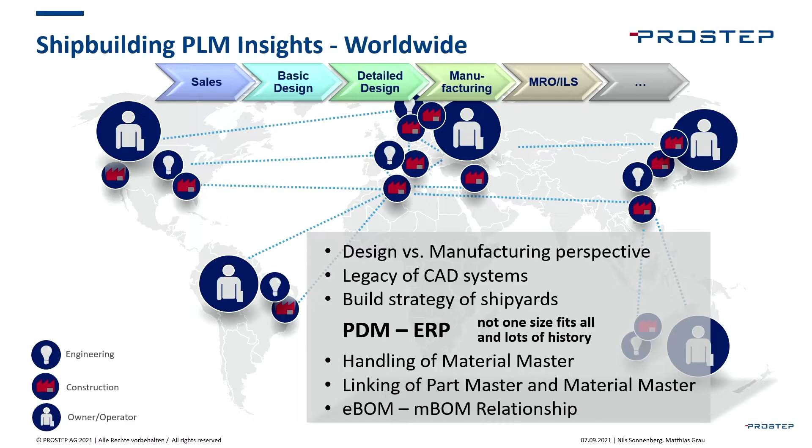Shipyards use different build strategies depending on their logistical capabilities and manufacturing approach, such as yard internal section pre-outfitting versus turnkey supplier for specific systems or spaces. This has an impact on the interaction of PDM and ERP and needs to be addressed by shipyards in order to be flexible and efficient at the same time.

Today we are going to discuss one of the most important topics related to PDM-ERP interaction. This is how material master data is best handled in a shipyard and how parts and materials are linked in both a make as well as a buy situation. This fundamental relationship of product design and realization is one of the longest experiences PROSTEP has had in its history. We helped develop best practices in many companies across all industries and can give advice and provide solutions to both business and IT.

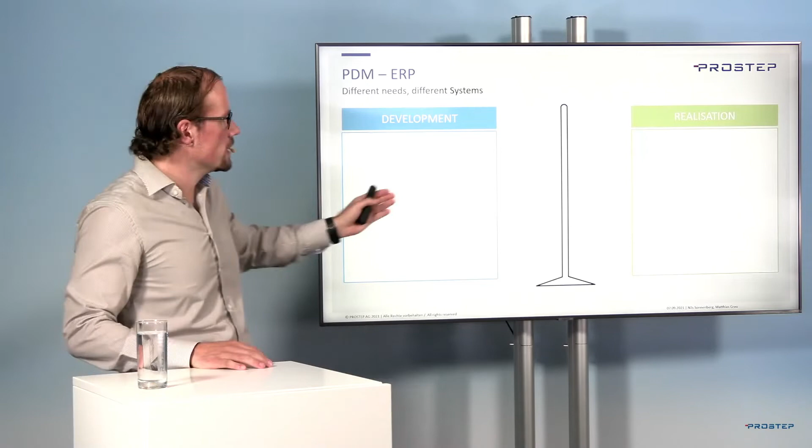Within this process, responsibilities have specific needs, and some examples are shown here on the left. For example, the 3D model is, I guess, the most common, and the belonging drawings to it. But also manufacturing data or test and trial documentations are present here.

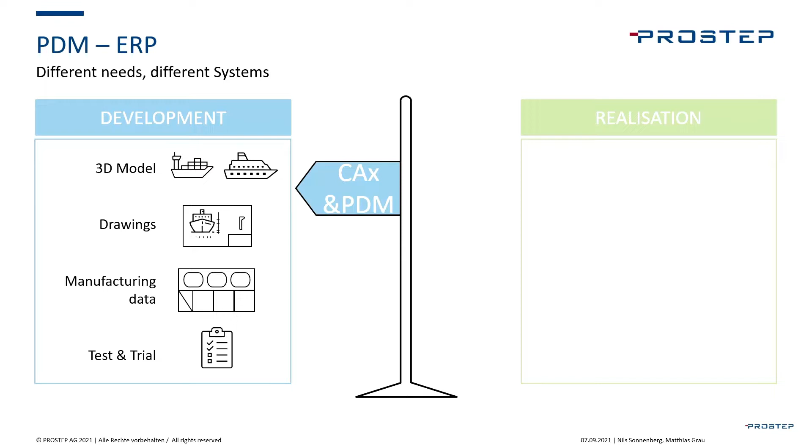But if you are more interested in CAx-PDM integration topics, check our episode 1 of this series. There, my colleague Jan Bitomski stressed this topic already. For now, let's focus more on today's topic, PDM-ERP.

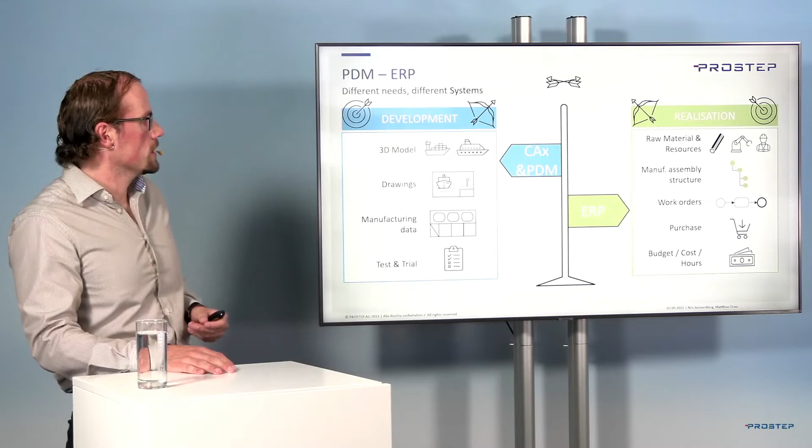Integration and downstream processes. This means, in fact, the interrelation of development and realization. In terms of shipbuilding, fundamental needs for the product realization are similar to other industries. For instance, companies have to deal with planning of resources. There are these examples, so raw materials, machines or labor, but also manufacturing assembly structures, work orders, purchase process, budgets, costs and hours, and so on. It's just an example. There are many more topics.

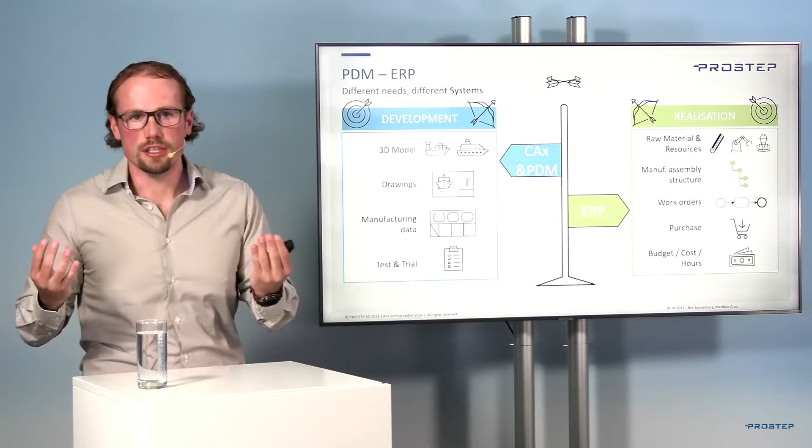But let's say the devil is in the detail. Due to the specific characteristics of a one-of-a-kind product, the capabilities of an ERP system, the system that supports the realization, need to deal with the existing specifics of a shipyard. As already explained, an ERP system is a system that is used to cover the requirements from the realization process. In history, these requirements were mainly stressed by stakeholders from the manufacturing core, with capabilities like manufacturing resource planning, or before that, material requirement planning. I guess everyone who's involved with ERP topics knows this core functionality.

But over the years, ERP vendors developed and added additional capabilities to their portfolio, as a reaction to the increasing amount of stakeholders, like suppliers, design, and of course many more, like the guys from controlling. Human resource capabilities are not mentioned here, but they're all present today. However, for a long time, common ERP software vendors were not able to provide suitable solutions, so shipyards were pushed to develop their own ERP system.

And still nowadays, on many shipyards, homegrown systems are in place, often more focused on manufacturing than on topics like finance. But in the end, it doesn't matter if it's a standard ERP solution or a homegrown system. Software capabilities nowadays have to fulfill the needs of the shipyard. Further, we will focus more on the technical topics today and not on the finance ones. In the second part of the episode, I will add examples from shipyards to some of these capabilities.

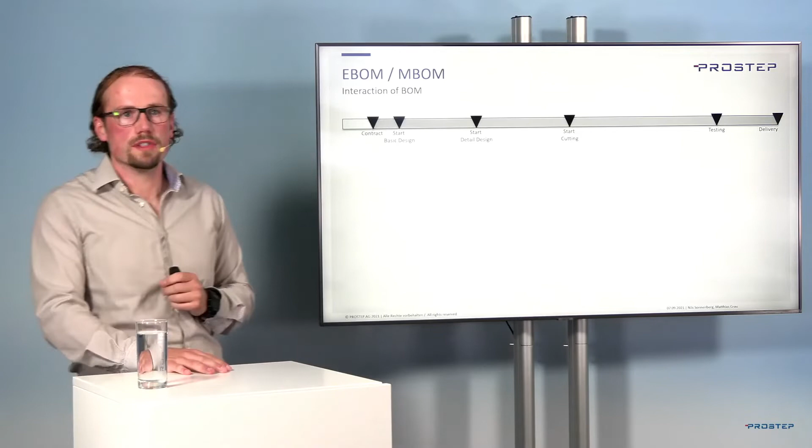What is shown here is the interaction of the EBOM and the MBOM, and how it could look on the overall shipbuilding process, which starts at the very beginning with the pre-contract phase and goes all the way to delivery. First of all, and this is one of the most important points, because of the manufacturing strategy in shipbuilding, EBOM and MBOM mostly run in parallel, and information needs to be permanently exchanged. But this is not enough. This permanent information exchange needs to be doable in both directions.

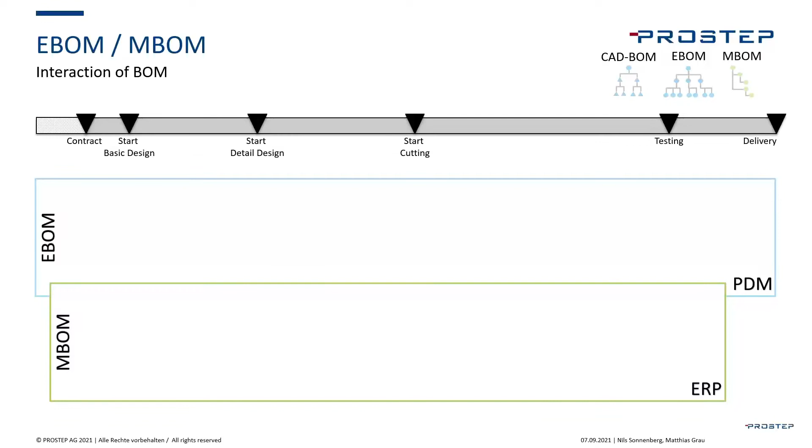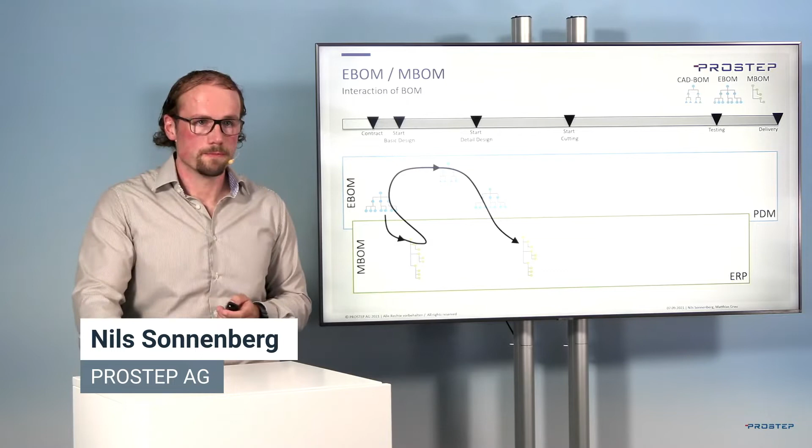In this first loop, the EBOM is initially created during the pre-contract phase. In this phase, the shipyard defines the systems and requirements for the systems together with their clients. At this point, the information is used for initial estimates as well as for supplier communication. An example would be the main engine. The delivery time is very long, it could be more than a year or 1.5 years, and that has an effect on the production side. But the MBOM needs to follow immediately. Why? To enable the estimation of a delivery date, for example.

Knowing systems is not enough. The shipyard needs to know what is to be built, and in detail, to enable the estimation of the required capacity from the production side. Therefore, the MBOM is used to synchronize with the current production load. Afterwards, when this is done, it goes back via the EBOM, and the design can be scheduled in reverse in accordance to the expected date in the production, which is given from the MBOM.

When the design is approved, here on the top, it goes back via EBOM and feeds the MBOM with the design data. So at this point, the detailed scheduling and execution of the production can follow. In the second red loop, I'd like to show an example for a change process due to an imperfection that is recognized from the production down there in the MBOM.

Let's say, one example, a faulty design has happened, and now this is just recognized in the production, and production realizes that the design is not producible. Thanks to the linked structure, it is shown which systems are affected so that the design can be adapted target-oriented. After redesigning on the top here, data can be transferred via the PDM system back to the ERP system, where the work planners can replan assemblies if needed and forward the design to the production afterwards.

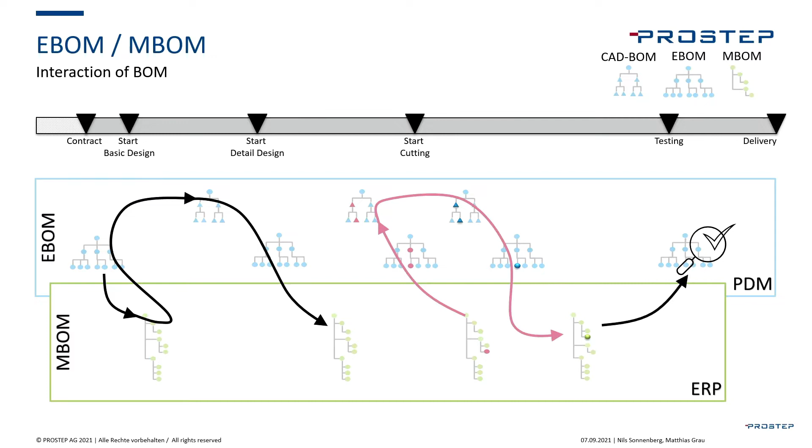Last but not least, within this last step on the right, the EBOM comes back to the foreground because systems need to be tested and approved against the initially defined requirements after production and installation. I guess this makes sense. You do not test an assembly or produced assembly, you test the systems themselves.

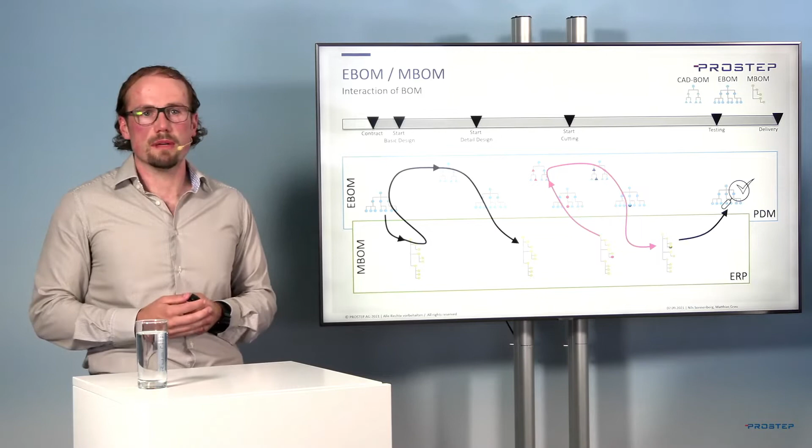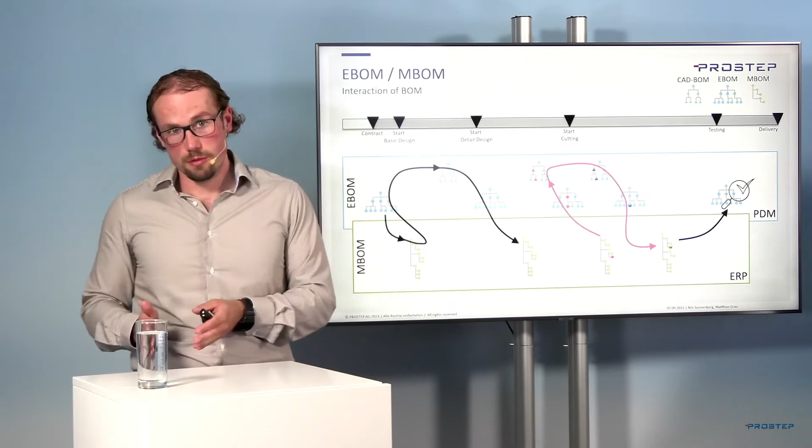Yes, and this more or less brings us not only to the end of the shipbuilding process, this brings us also to the end of the first part of this episode. So at last, for this first part, let me sum up what we know so far. During the overall creation, a ship runs through a development and a realization process. Each of these processes has its own required work breakdown structure due to the different perspectives of the process stakeholders, the EBOM and the MBOM.

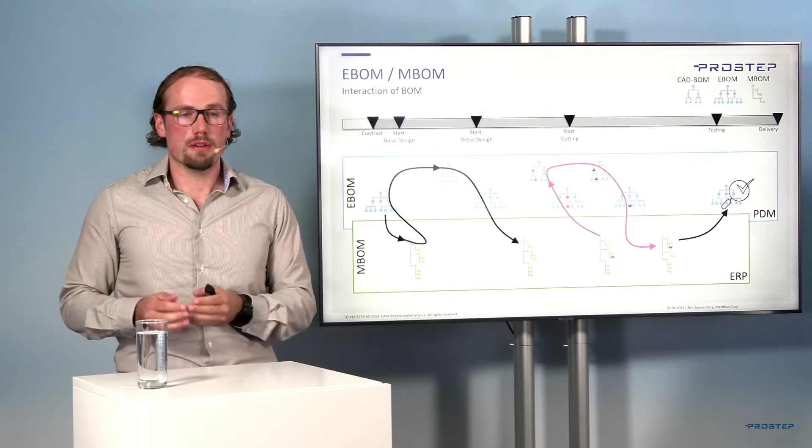But nevertheless, both of these stakeholders are dependent on each other. So EBOM and MBOM, the last point here, run mostly parallel, and the information needs to be permanently exchanged in both directions. So that's the first part from my side, Matthias. Thank you, Nils. Thank you.

You mentioned some of the standard capabilities in ERP, such as part and material master data management. This master data must be in sync between product design and realization planning, as you explained when talking about EBOM and MBOM. Thinking about shipbuilding here, can you please give us a more specific example from your recent projects?

Yes, Matthias, I will try to, and I guess master data management is a good example to explain the interaction of PDM and ERP in a little more detail. And moreover, according to my experience, and I guess your experience is the same, currently many shipyards are interested in this topic. So what is meant by master data management? Let's start. In this scenario here, I will show the material master, which is one expression of master data management. And here, at first for a make part.

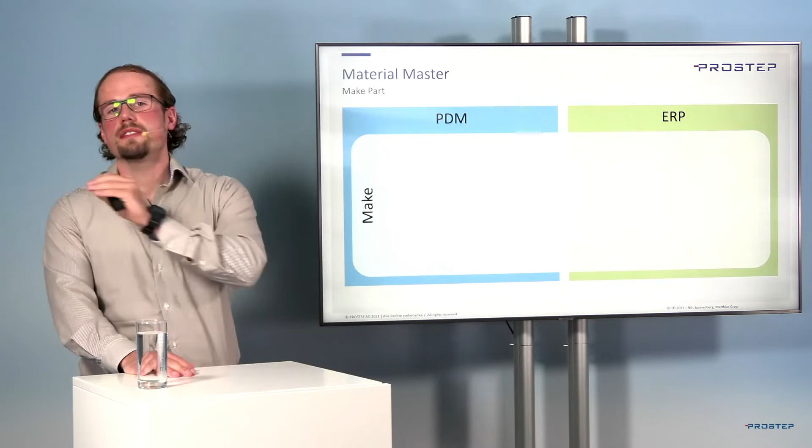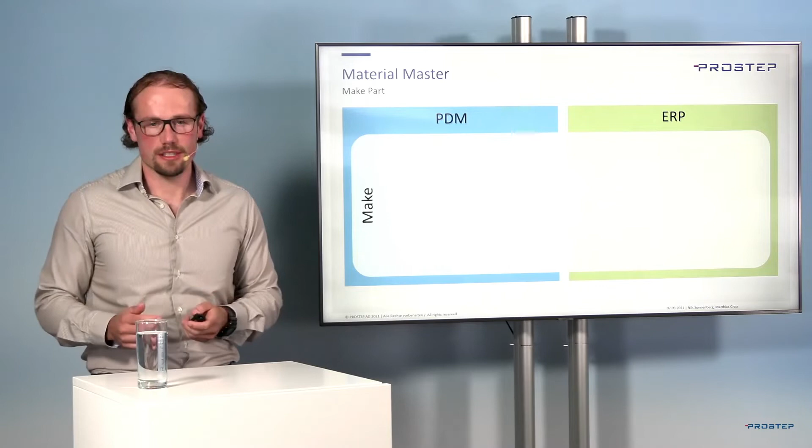Material master, for the understanding, means that the leading information for the part creation is coming from the material master record, which is normally managed, and that's totally okay, in an ERP system. And make part means that this part will be manufactured by the shipyards themselves. That's just for common understanding.

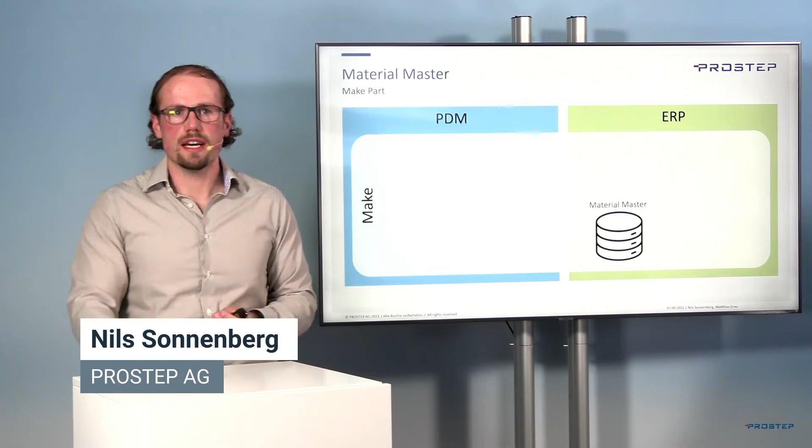So when designers start their work, they always have to consider certain dependencies from the realization side, which limit their design space. For example, theoretically, a designer is able to create every kind of product, so to say, handmade, but at least when this part needs to be produced, purchasing or production faces problems. The purchasing needs to find and order a suitable raw material or prefabricated material, but due to the uniqueness, that could be a big problem for them.

And in addition to that, the production has to find a way to handle this with their existing manufacturing capability efficiently. The second point is that designers don't want to recreate every repeatable part again and again. That would take way too long. Instead of that, direct access to a categorized part template in a design app would help.

But now you may be asking yourself, creation and use of templates in design apps, isn't that a standard functionality of a design app? And I can say, yes, it is. But the difference in this context is that this data is not connected to the system that specifies the up-to-date information for this template. With the consequence that the creation and permanent maintenance is labor-intensive work. Here we are talking about material master management.

That means that the presented predefined design options are continuously synchronized with the material master information in ERP. And it has the benefit that manual maintenance of the siloed information is not necessary. And further on, time-consuming approval workarounds can be avoided. So,

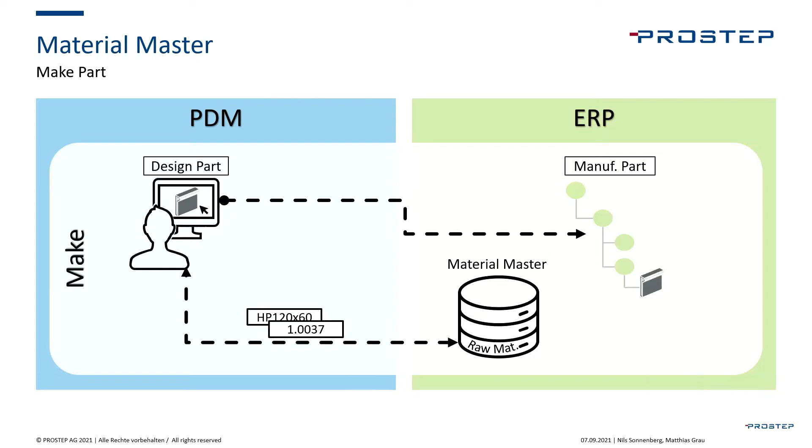So, okay, then at a certain point, the design is ready, reviewed, and approved. In the following step, it can be forwarded to the ERP, where it's linked automatically to the MBOM structure node by its given attributes. This is another topic, this allocation to MBOM, which is very common today.

Because of the continuously linked data, the assignment of one specific raw material at the end from stock is simply obvious, let's say. So I know this specific profile from the stock is allocated to this part in the MBOM structure node that is shown here. Finally, at this point, all information is available to carry out the work. Last one here.

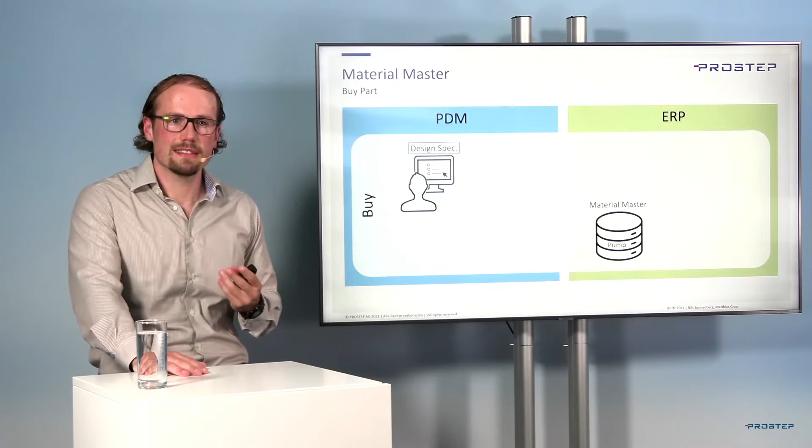In our second scenario, the designer wants to create a design part for a purchase part. In this example, a pump. So instead of doing ordinary design tasks, the designer here accesses a catalog via the PDM system where he can view all pumps that are viable from technical and supply perspective, with, of course, the technical and supply relevant information. After these selections, the process for the next step is similar to the one of a make part.

Meaning after the review and approval step, the buy part can be forwarded and linked to the MBOM, like it's shown here, in the ERP. Last but not least, the purchase process can start in order to provide a delivery aligned with the planned installation date.

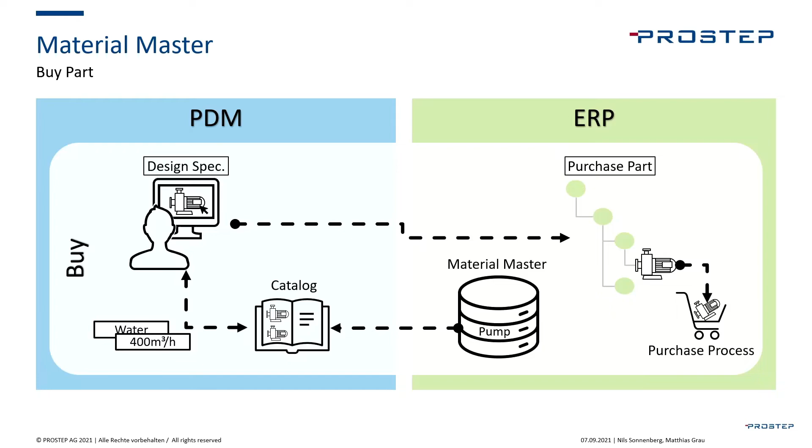Okay, I guess this was not just a little bit small scope. We triggered a few other topics, but here we have concentrated on the make and buy part in relation to the material master management. And at the last point, yes, I hope that I was able to show how strongly these two systems are dependent on each other and how important a good collaboration between the systems is.

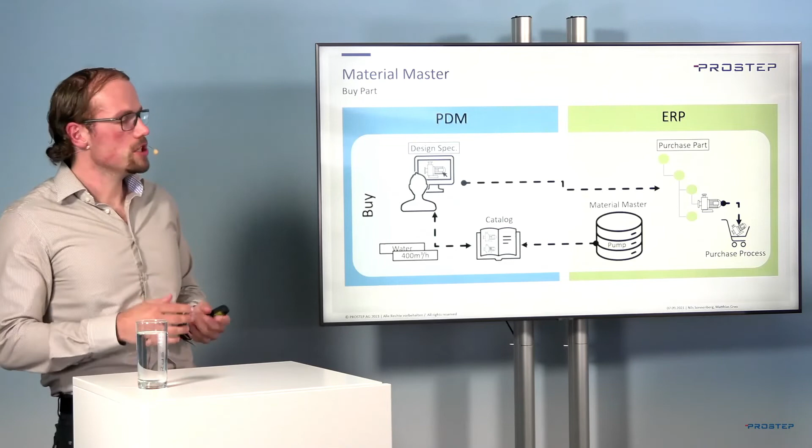For now, I'm more than happy if we were able to give you some impressions regarding PDM-ERP integration in downstream processes. Of course, as I already said, we were showing just a small but very valuable screenshot from a bigger picture of PDM-ERP, and no doubt there are many more scenarios that we would like to discuss with you, maybe in another episode, or in a direct conversation.

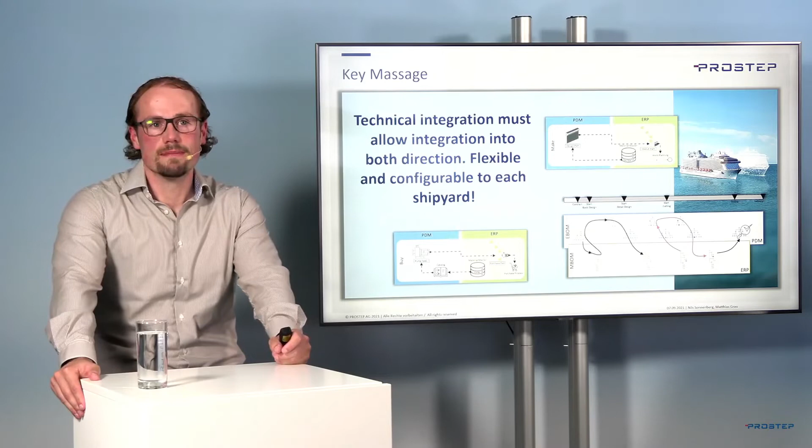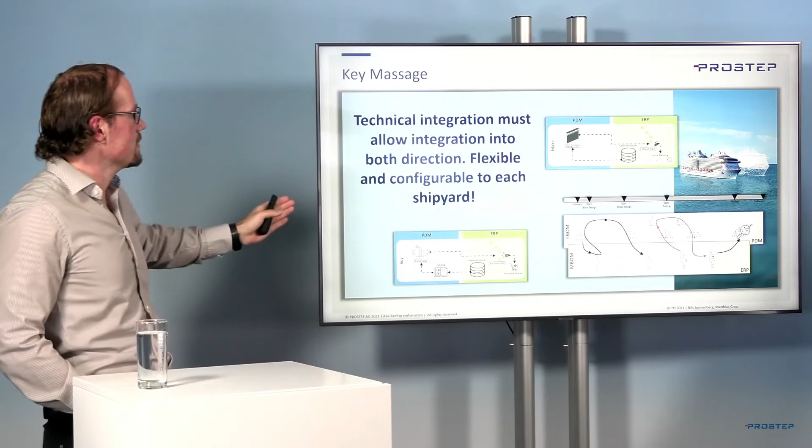Last but not least, for all of those who have just tuned in, or even for those who did not get everything I've tried to express directly, I know it's not so easy, this topic. Please keep this one message in mind. Technical integration must allow integration in both directions, flexible and configurable to each shipyard. Thank you very much. Matthias.

Thank you, Nils, for this nice overview about how design parts and materials are related in a ship development process. So what we learned in the second part of Nils' presentation is that different scenarios like make or buy have different requirements that need to be handled by shipyards. Both require ERP-based material master data being made available to the designer in both PDM and CAD.

Parts created by designers need to be provided to resource management for material requisition, purchase and production planning. If there is a change, this needs to be updated at both ends and kept consistent at all times. And this means PDM and ERP interaction is a two-way process that is going on during the entire ship development phase.